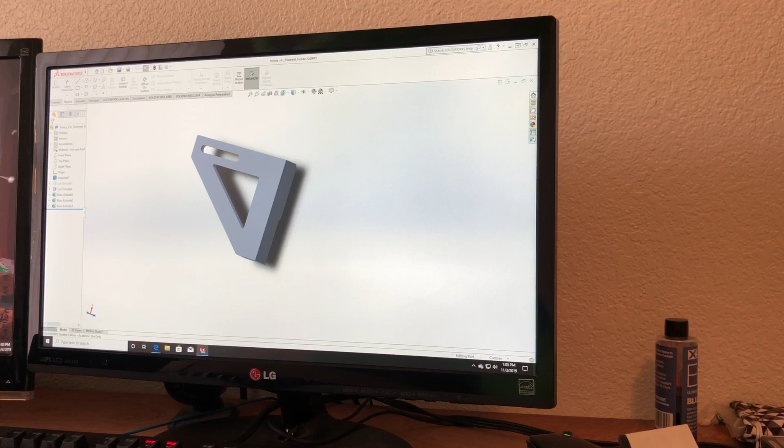You can see this part here is a filament holder bracket, because when I moved to New Mexico I accidentally broke mine, so I need to make another one. Once you're done making your model, you go to export and save it as an STL, because this is the file that the printers read. So now that's saved into my Google Drive and it's currently uploading onto my printer computer.

Let's go over there and see what's happening in that room.

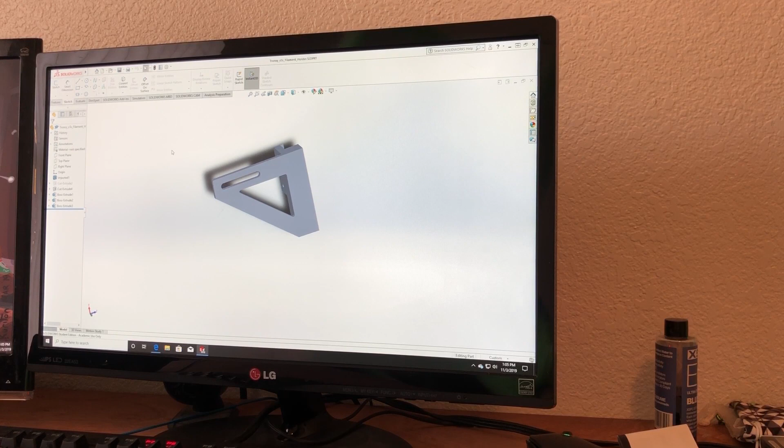So here we are in the printer room. I've got mine here in this nice little box. I'm printing ABS, so I have it in this sealed box, that way all the toxic fumes don't get out. Of course, most filaments create toxic fumes, but some more than others.

You can see my spool is just sitting there on the floor because the holder broke off, so I need to make another one. Your printer will have its own controller program. Mine's an X5S, so it came with a program called Repetier.

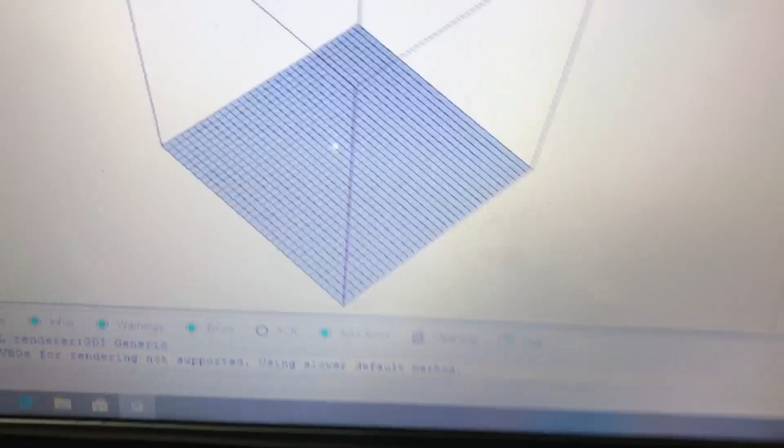So I'll go ahead and get that running. Once you open it, it shows your build space. Mine is 13 inches by 13 inches by, I think, 15 inches. So you can see our little cube of build volume that we have, that way you don't try to print anything too large for it.

The first thing you need to do is heat up your hot end and your bed. Depending on what type of hardware you have, this can take a short or long amount of time. Mine is only a 12 volt system, so it will take a bit of time to warm up.

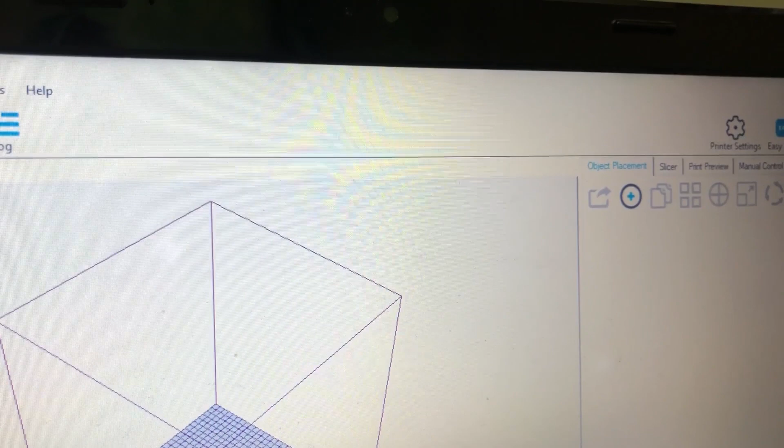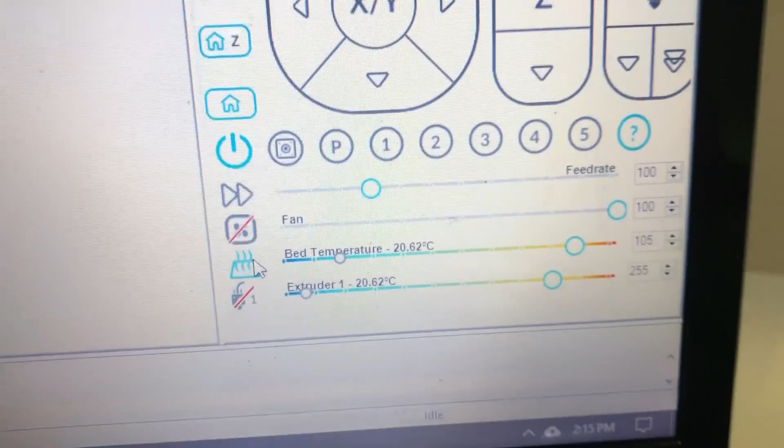In these settings, I have my bed set to 105 degrees and my hot end set to 255. I'll wait because the hot end takes a lot less time to heat up than the bed, so I'll let that go. This is for ABS plastic, which needs to be in both of those ranges. Each printer differs, but mine seems to print good at those, so I'll stick with those.

Of course, not all printers come with a heated bed, but a heated bed makes it a lot easier to print stuff, so when you get one, you want to look for one that has a heated bed. Of course, they're going to be more expensive too, so it's a trade-off.

As far as the two temperatures go, when you get your filament it will usually have a sticker on the side telling you what your nozzle temperature and bed temperature should be. You start with those and adjust up or down depending on if it worked good or not. So you'll see this is a lot of trial and error when you start working on these.

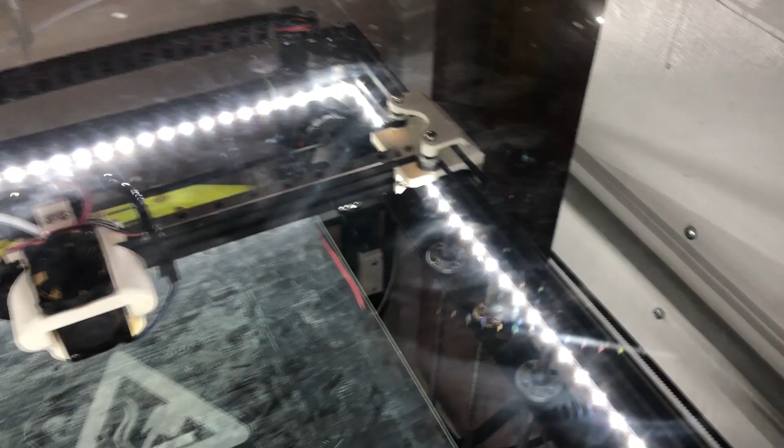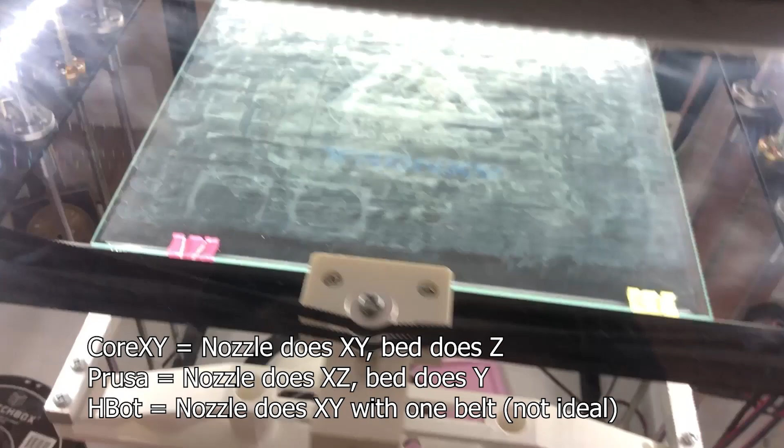Like I said before, this is a Tronxy X5, so it's a Core XY printer. The hot end does the X and Y axis, and the bed is in charge of the Z axis. This one comes as a 2-post, and I put in 2 extra posts to make it a little more stable when it moves up and down.

So if we go back over here, I can click the home button and it will home all of the axes. You can kind of watch it work in real time when I click.

You can kind of see the bed moving. The bed moves the slowest, obviously, because it has the most fine adjustment.

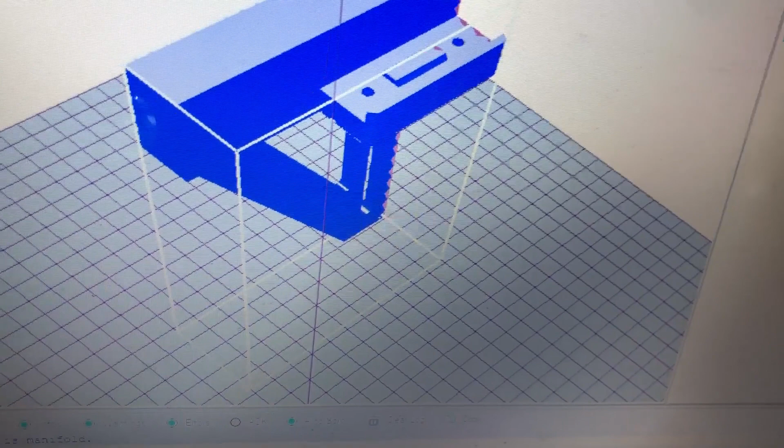So we can now go import our file. Here's our part that we saw earlier. Now I just need to adjust its position, so we'll go over here and rotate. And it is ready to go.

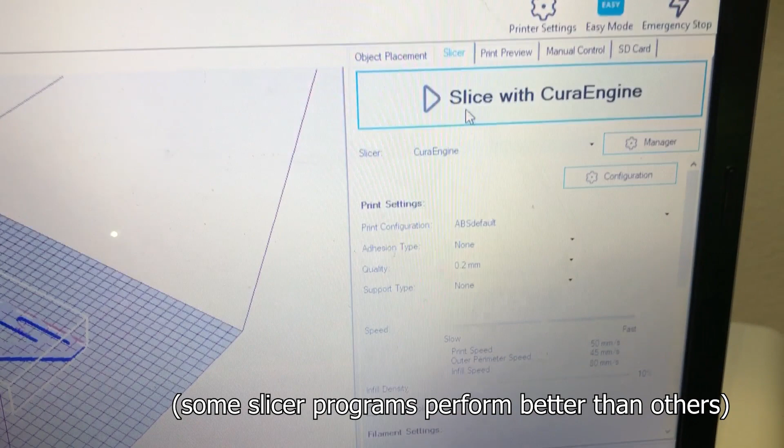So the next thing you need to do is use your slicer, which these all come with built-in slicer programs. Cura is the one that I use because it works okay, but there are plenty of others you can use. Depending on what program you have, they come with whichever.

You also have to put in all your different settings in this one. I have mine on ABS settings, which comes with all these different things. You'll have to read up online the definition of what all of them does when you adjust them. So it is a lot more complicated than it looks initially.

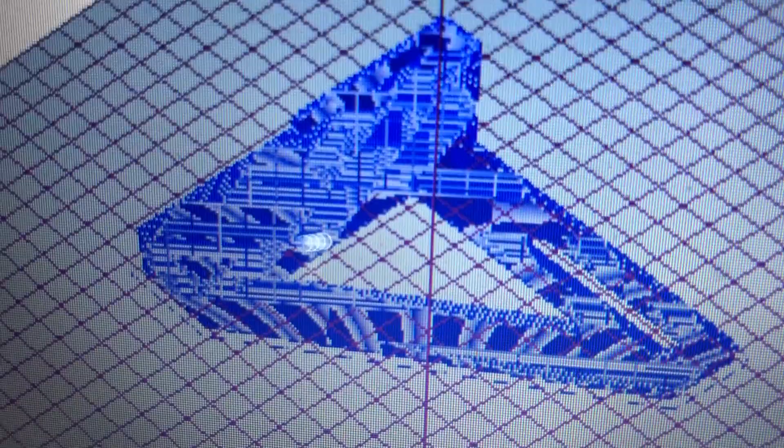But this one I already have all the settings made, so all I have to do is click the slice button, and what that does is it builds your tool path for the part. I think it's loading right now. Did it work? No. There we go. So now it disappeared and it comes back as this little thing with all these lines, and it shows you your build path for the whole thing.

It also gives you how much filament it'll take and your estimated time. You see the bed's almost there. It takes a while. You can buy better beds if you have coin.

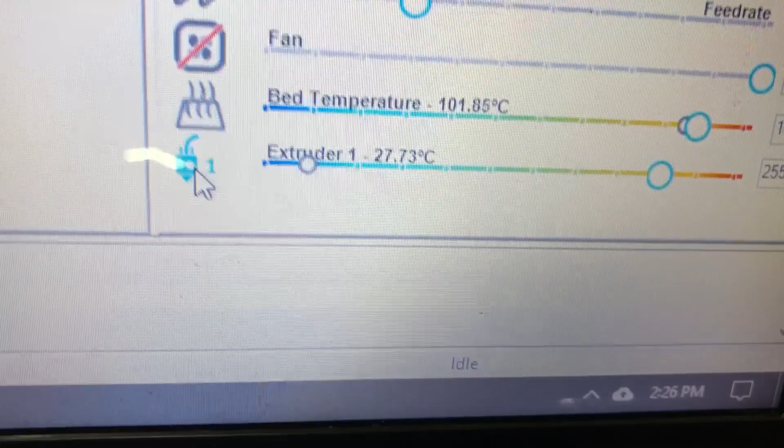Those ones heat up in like 5 seconds. I just haven't gotten one yet. You can watch this one really jumps up there with the temperature. So that one, I don't even have to turn on and wait for.

For all intents and purposes, I'm assuming your printer is ready to go right out of the box. Some of them require some adjustments and fine tuning before you can actually start working on them. Like this one has a manual bed, so that means you have to adjust the height of it yourself for it to actually get a good level print surface.

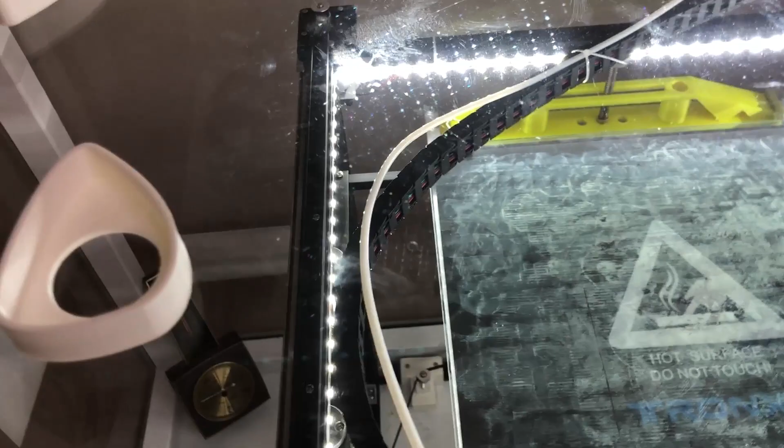Others automatically do that, which is nice. Of course, mine is cheap, so it didn't come with that feature, but some of the newer ones do. I'll now hit the print button now that it's warm and show you how everything works.

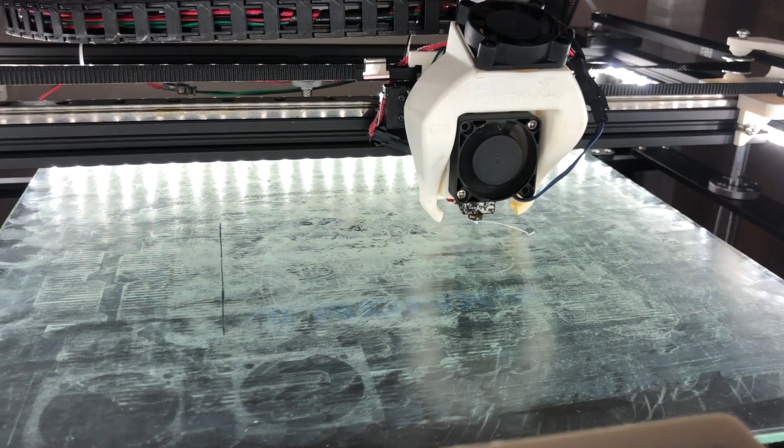You can see that little straggle of filament left on it because once it heats up, it starts to just kind of ooze out by itself.

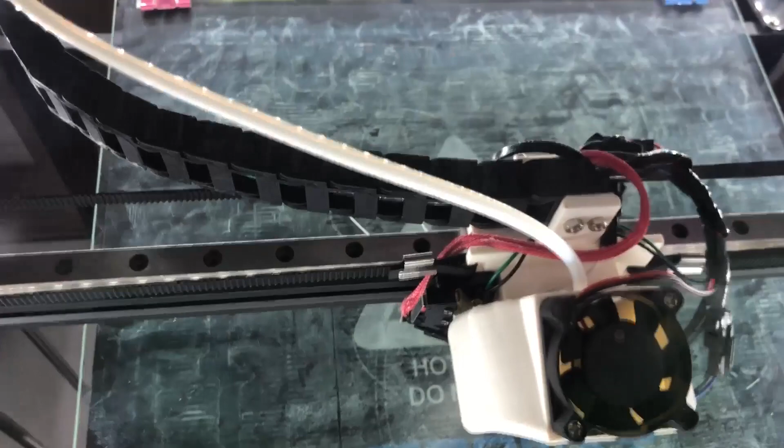And now you can watch it in real time building your profile. You can see the outline is not really cooperating right now, which means my bed is not as high up as it should be.

You can see how it's doing perfectly now after I restarted it without touching anything. So that just goes to show that these are very temperamental when it comes to wanting to print. Also, depending on the kind of motors yours comes with, they're pretty noisy. This one likes to make music as it's going.

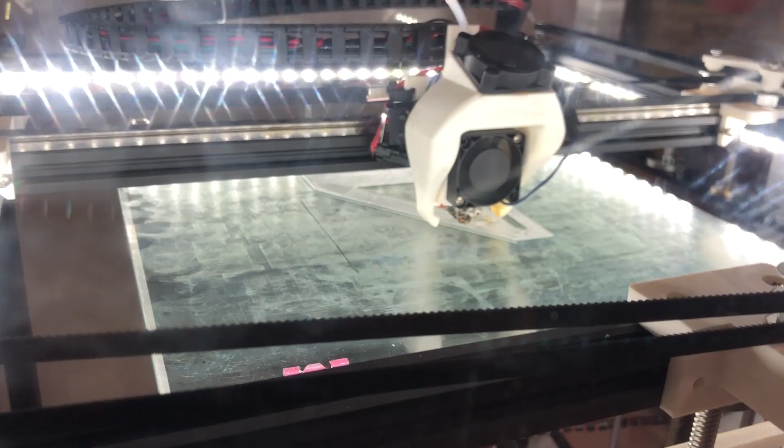With that being said, once your first few layers are down good, then it is pretty much good to go for the rest of the print. Hopefully. Sometimes it likes to die mid-print when it's making some of those complicated structures, but that's something else to get into.

Yeah, I told you this one's loud when it's going. Makes music. So here is our finished piece.

A word to the wise. I don't suggest pulling this off immediately after it's done because one, it's really hot still, because of course from earlier the bed was at 105 degrees. That's Celsius, by the way, so that's 5 over boiling point of water. And two, it's gonna be stuck, and if you try pulling it off immediately after, it's not gonna wanna come off. And you run the risk of breaking it too, which I've done that before, so take it from me.

Oh, and lastly, because it's at 105 degrees, that's the glass transition temperature for ABS. So when you peel it off, it's gonna be like really bendy, and then it's gonna harden in that distorted shape, and you won't actually have the shape that you printed.

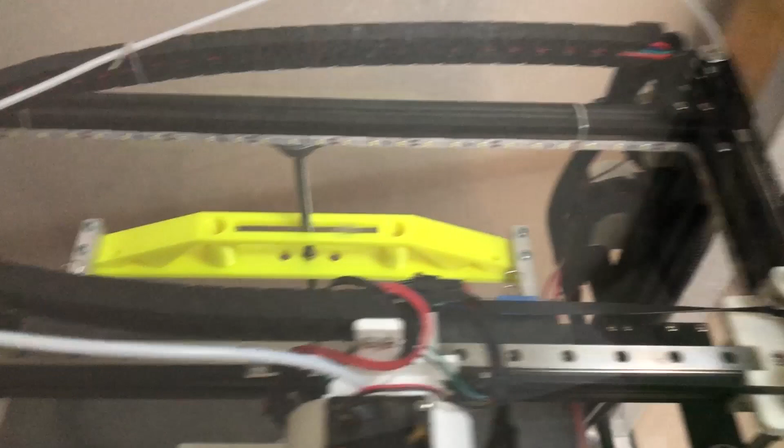Now we can kind of go over some of the parts that you'll see on these printers. You can see we have our fan up here. That top one is the part cooling fan. You can see that goes into those two fang ducts and they blow directly on the nozzle there. So when you have a part that needs to print at basically extreme angles like 90 degrees, it'll blow air on it. That way it can cool the filament faster.

The other fan in the center is your actual hot end cooler. That one needs to be running all the time. Otherwise all the heat will go up the hot end into the filament and it will melt prematurely, and then it will clog the hot end and you won't actually extrude anything. So you want to have that fan running, that way it only melts in the area where it's supposed to.

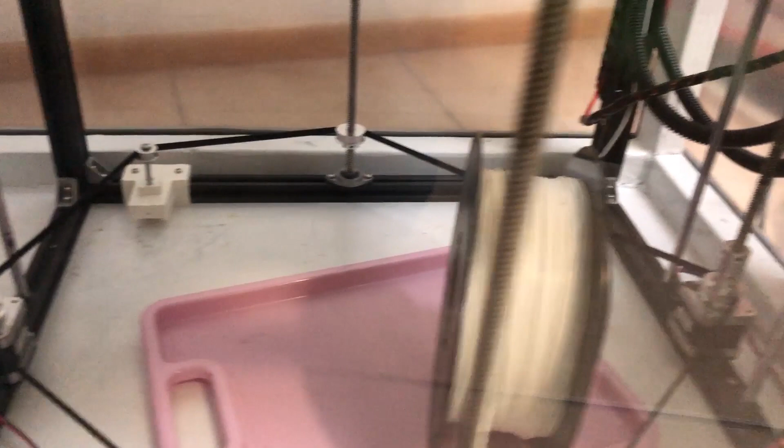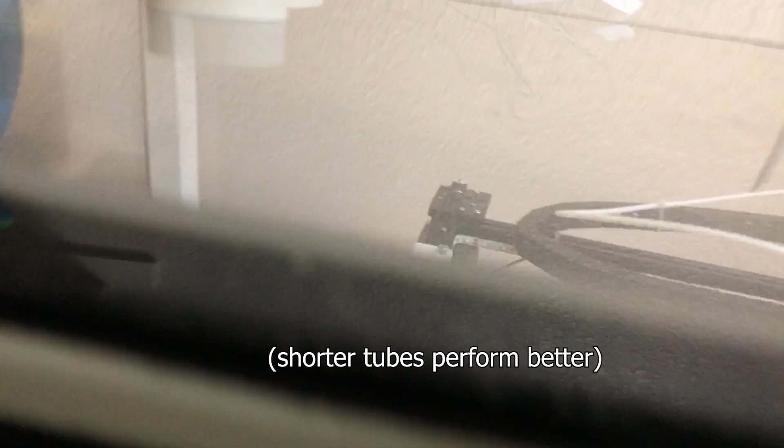Your other motor is your extruder motor, hiding in the corner down there. That's basically just a sharp geared tooth that digs into your filament. You can see the filament is a big spool of basically string made out of plastic. All it does is dig into that and push it through this plastic tube, which goes into the nozzle. The nozzle is heated up to 255 degrees, so the plastic melts. It gets pushed through the nozzle hole, and then it draws the path, and that's how you get this.

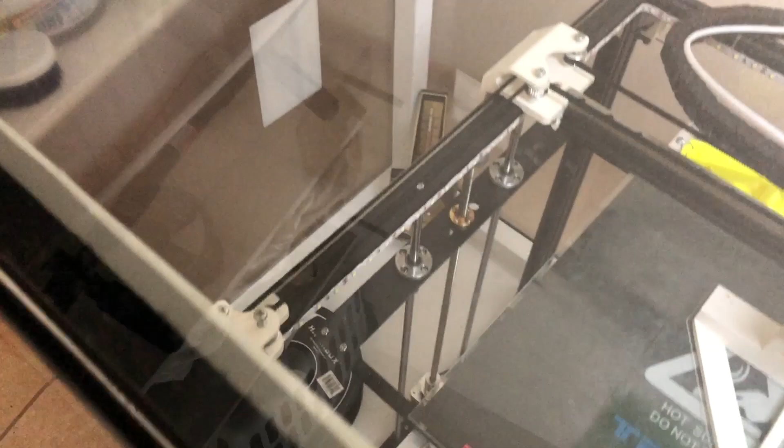The other stuff you have is just your basic drive motors. So you've got an X and Y motor there, and then you have your Z motors on the bottom. Depending on where the motors are is based on whatever brand you have, so they're all different. This one's also a little bit modified, so it doesn't look the same as the normal Tronxy printers. But other than that, that's pretty much all your basic stuff.

So our controller hardware is here. We have our main board. This one is not wireless, so I have to plug in via USB if I want to print. That's why I have the computer dedicated to this. Some of them have features with wireless printing, which you definitely want, because it's more convenient. You can see this one has a MOSFET to control the bed. The bed has its own dedicated power supply too, because the bed draws a lot of amps, so it needs its own. We can go into our actual print settings here.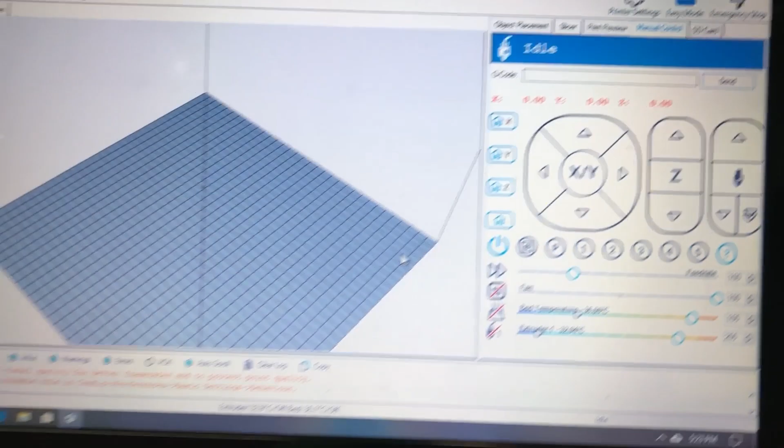You can control the feed rate for the filament motor, and you can control the part cooling fan. You can't control the actual hot end fan because that one just needs to be running at a constant speed to keep the heat coming off it. You can control the temperature of your bed and your extruder. Depending on your filament, you can change those however you want, because each type of filament requires its own specific temperatures.

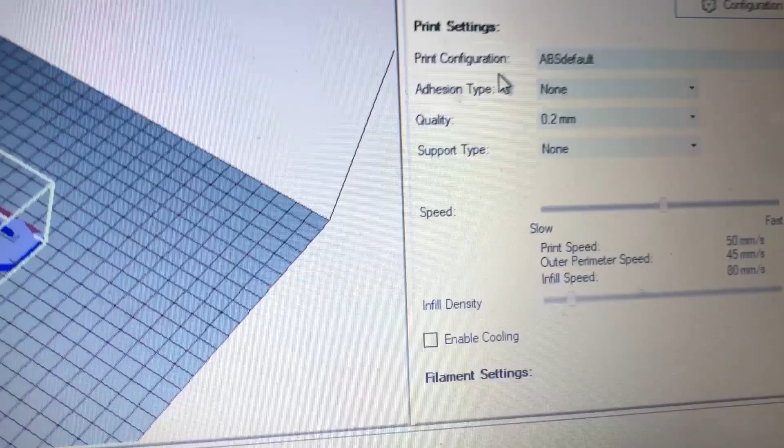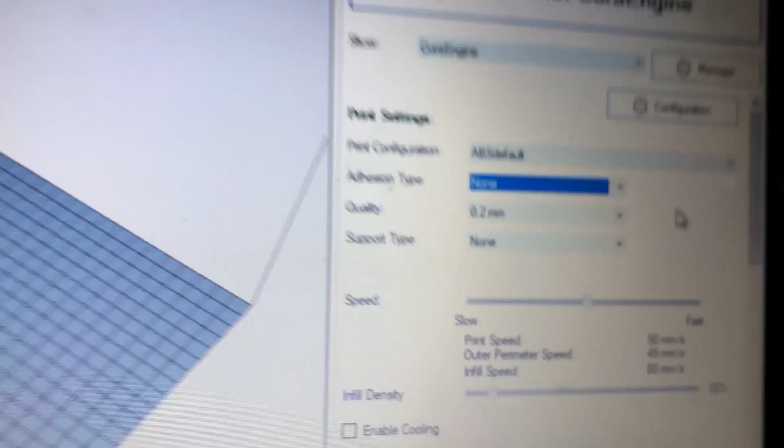For the actual slicer settings, you have your profile and any type of adhesion you want. You can look up the definitions of each one of these for what they mean. Adhesion is basically for when your stuff doesn't stick on the bed easily - ABS is very finicky when it comes to sticking. So you can put in certain types of adhesion assistance, which I have working pretty good. You saw my bed was kind of hazy earlier - that's because I put glue down on it so it'll stick better. You can also add in a brim or a raft support, which puts in little flat things that go on the outside so it sticks easier.

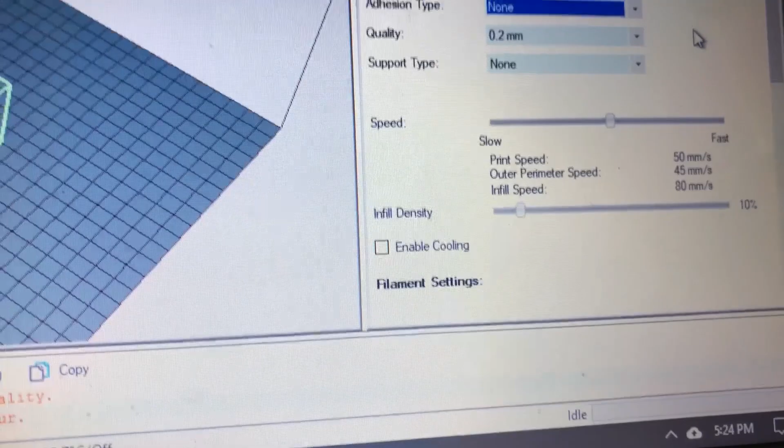Your quality is basically just your layer height. So if you want it to be more jagged on the Z-axis, you can make that taller and it'll also print faster. Supports are for if you have any overhang - if you're printing stuff that isn't just straight vertical, you can add supports in to help it so that it doesn't bend. That's also what the part cooling fan is for.

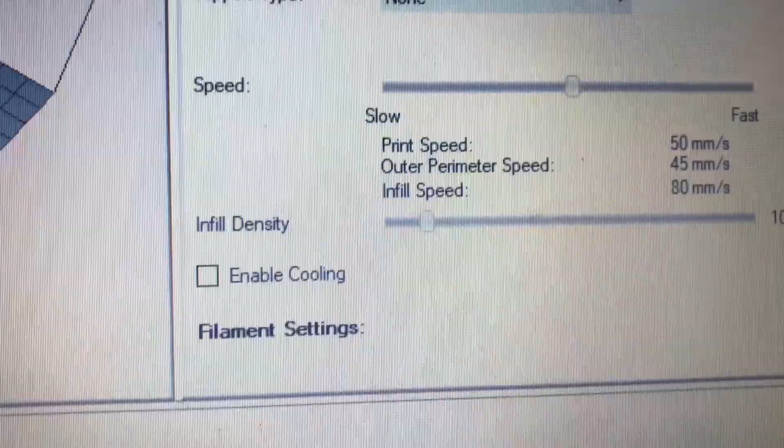You can also change your speed for how you print. Core XY style printers print really fast, which is nice. And then the infill density is just how much you want the inside to be. If you make that 100%, it'll be just rock solid plastic, and if it's 0%, then it'll be completely hollow inside.

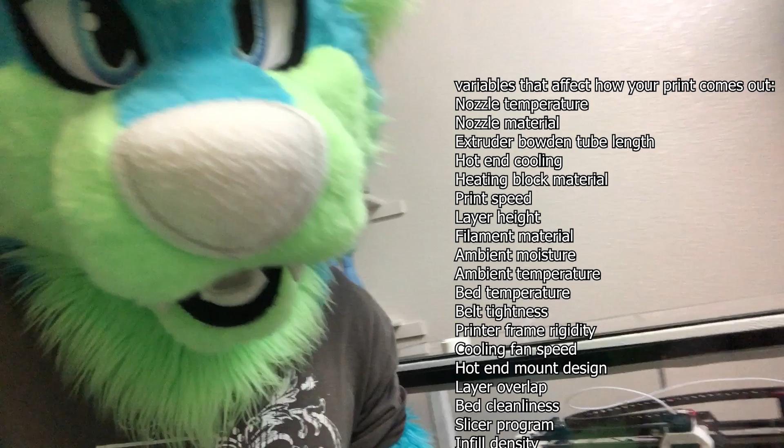So I think that gave you a pretty good understanding of all the basics for it. You'll find out soon enough that there are probably 10,000 different variables that all change and all affect your print in one way or another. So good luck working with it - it's a lot of trial and error. Feel free to join a forum of people that have your same style printer, because they already went through it and they probably have the answer for you.